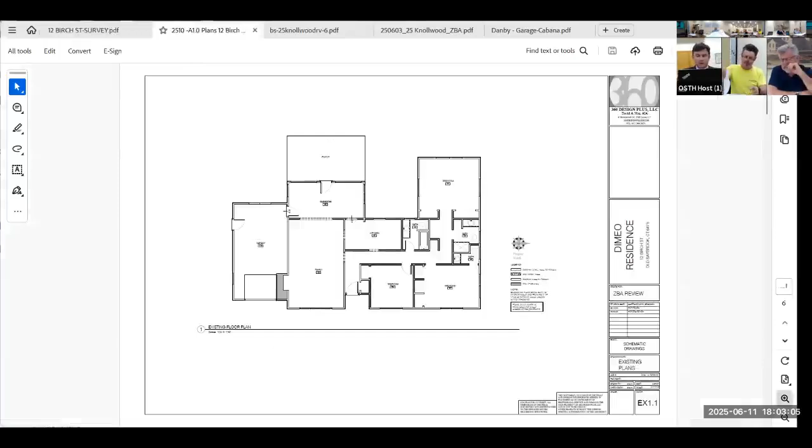As part of the floor plans, the existing floor plan shows part of the reason why we're asking the variance, in particular to elevate the roof of the garage. The garage is on the left side or the north side when you're looking at the site plan. Right now, when you walk out of the garage into the sunroom, you then have to walk up into this room that's called a family room. Okay, so the garage is low, the sunroom is a step up, and then this is a further step up. Is that right? Yes, and then the porch is off the rear of the sunroom.

So what's being proposed is to come out of the garage, redo the kitchen, living room into an open floor plan concept. When you come out of the garage, you're now coming onto the main level of the house, the old family kitchen level, into this newly updated portion. So in order to do that, when you're stepping out of the garage onto the higher level, the architect needed to raise the roof. I think it's what, 8 inches?

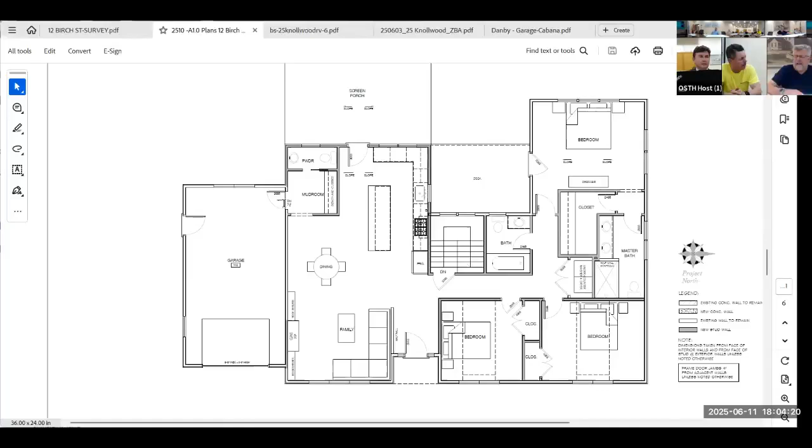So in reality, because when we look at that, it's basically a 7.5 foot step is what you're proposing. Yes, 7.5 inch. But what was confusing was that was 7.5 inches, and then on the original, in the next drawing, it's still 7.5 inches. So I was confused. So was it?

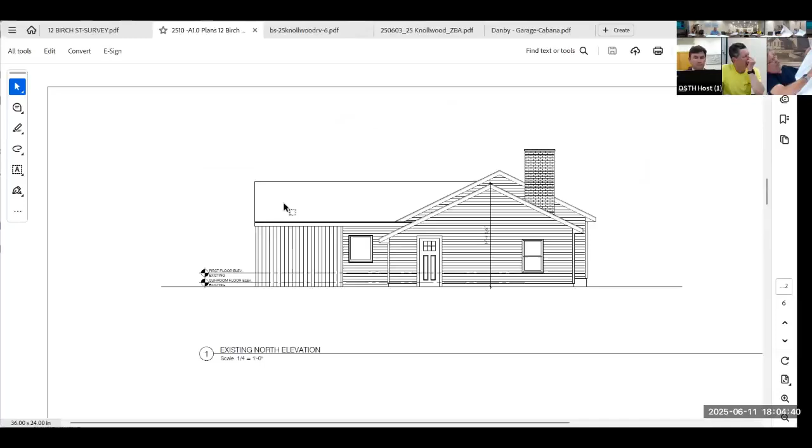Because you show, this is the original. Yep, see, on the original, you show 16 inches down, which would imply that it's a 2 foot drop almost. 16 inches, 2 steps, 2 risers. Yeah, two-step drop. That's what I was confused about. I was having trouble with that.

No, but what he just explained was that you have 7.5 coming in, and then you have another 7.5 right there. Correct, or, yeah. That's confusing to me too. Why is it 16, and then why is it inches over here, 16 over there? That's what I couldn't understand.

Well, Lorenda, when you walk from the garage into that lower level, it's straight, and then it's 16 inches up. Oh, so the sunroom and the garage are even? Yes, that was the problem. All right, the drawing's not accurate.

All right, not me, it wasn't me. No, I couldn't understand it. You understand, because it doesn't add up, because it didn't add up. I was trying, so currently, oops, sorry, you can walk directly from the garage into the sunroom. And then you have a 2 foot.

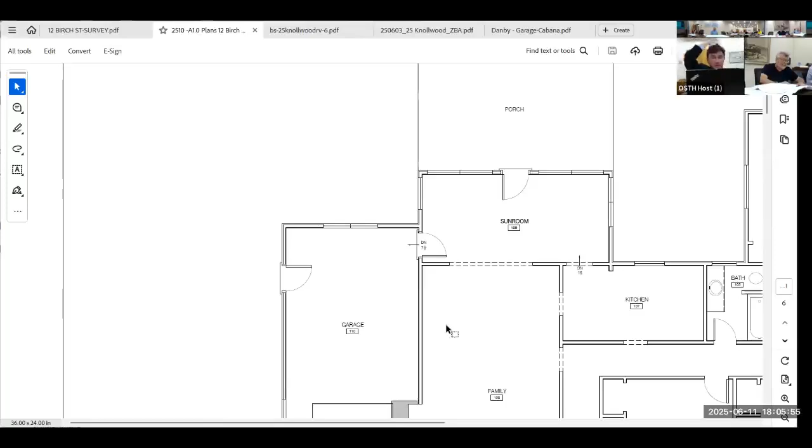So in order to make the door from the garage into the new kitchen mudroom up 2 feet, you have to raise the roof to get the headroom necessary. We want to put the stairs in the garage to get up into the house, but we don't have the height, the two risers, out of the garage into the sunroom. Okay, now it makes sense, because it didn't before.

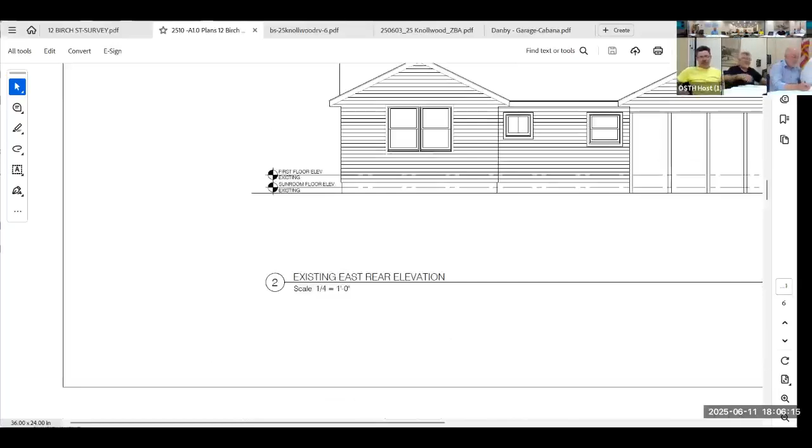Sorry, you can understand why that was confusing. I was concentrating on going from 14' 6 5/8" to 15' 3/4", but in reality we're going up 16 inches. So it's 2 steps, but not the height of the garage itself, the floor is going up.

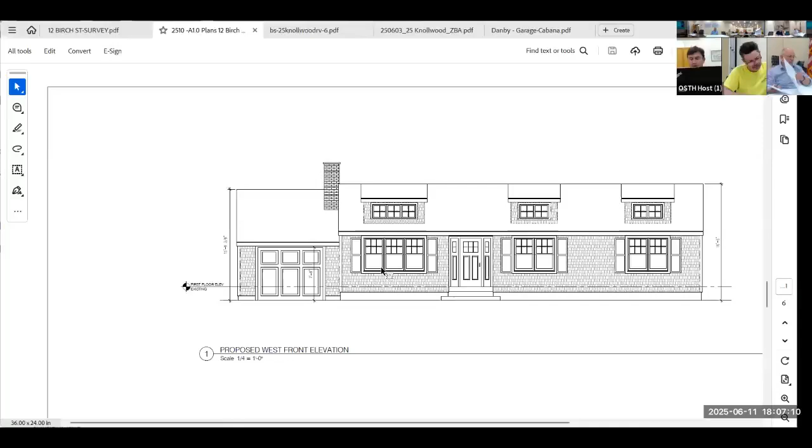And the new garage roof is no higher than the roof of the existing ranch, which is staying the same. The second thing we're asking for variances for is those 3 dormers, which are basically window dormers to allow a little bit more open air and light into the first floor.

It's a single floor, we're not adding a story, we're not changing the roof line, it's just aesthetic and light. The third thing we're doing, which doesn't require a variance, is a new deck constructed on the rear of the property, infilling between what used to be the sunroom and porch and the bedroom. So our coverage is going up slightly, but still complies at 18.9%.

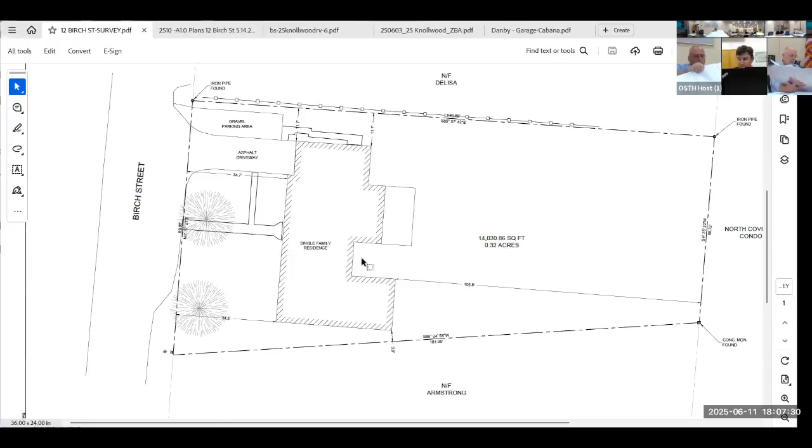On the south side, the southernmost dormer doesn't actually go all the way, it goes to 11.5 feet. On the north side, the garage being elevated goes to 11.7. So those are the 2 variances required, 11.7 and 11.5. The hardship is the implementation of the Residence A district regulations on this non-conforming lot.

House was built in 1954. As we discussed, the garage expansion is to create headroom into the main house level. The dormers just go outside the volume of the house a small amount, just a few feet for the 3rd dormer. The other 2 are legal.

No increase in height in the main part of the structure, but we believe these changes will add to the aesthetic of the house. So that's the presentation.

If I can just add one thing, there is a little bit of a step in the garage, probably about 4 inches. It's like a half step, it's the foundation. Do you want to see the picture? No, we can't do that, I can visualize it.

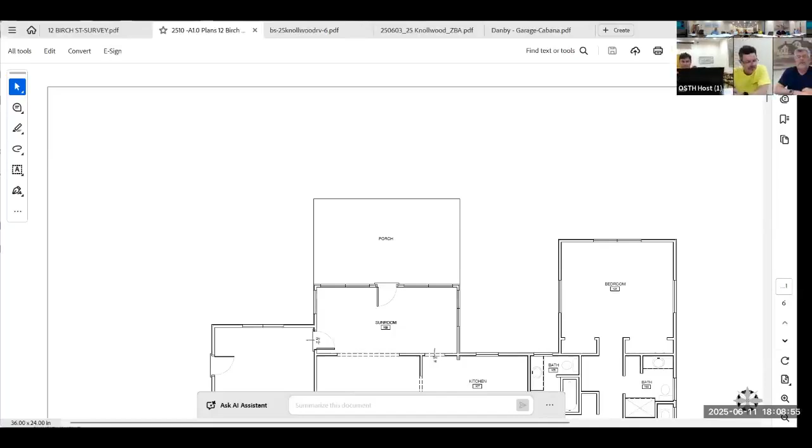Are there any questions of the applicant at this time? None for me, it's pretty simple. Marty, any questions? No.

I would make a recommendation - looking at these plans, the proposed steps down 7.5 inches from the new mudroom. I would modify the plans before you submit these to show the 2 risers, plus or minus 16 inches, so there's no confusion about what's going on. These are just preliminary, for ZBA review. I was simply making a suggestion so when they go to build it they won't be confused like we were.

All right, hearing no questions, I would like to open it to public comment. Is there anybody in the public, here or online, that would like to speak for or against this application?

A second. Anybody, would you like to add anything? Okay, hearing none.

I'd like to make a motion to close public comment. Did I get a second? Second, to close the public hearing. All those in favor?

Okay, let's go into discussion. Is there any discussion we'd like to have before I make a motion?

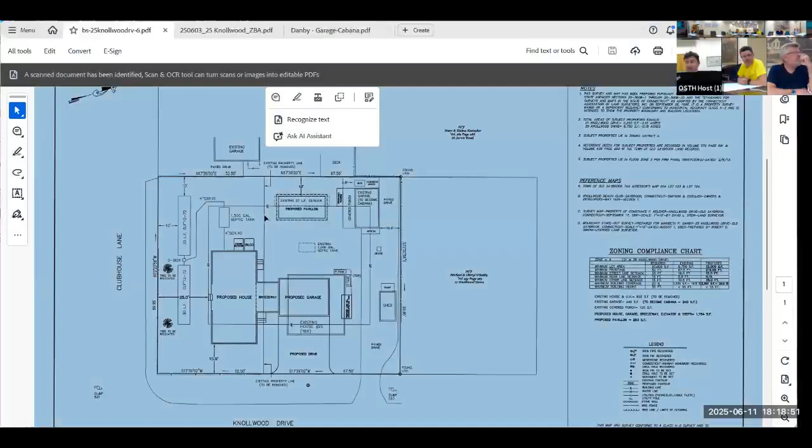So the hardship: we have the Residence A District regulations implemented on this corner lot. If this were not a corner lot, and Clubhouse Lane was the front and Knollwood Drive was the side, we wouldn't be here, correct? This would be a compliant proposal. So that's number one. Number two, we do have reductions of nonconformity.

First, there are two existing parcels right now, 6,700 and 5,200 square feet. Those are two separate lots that are both substantially non-conforming. The 6,700 square foot lot on the north with the proposed house is also too close to the side yard setback, at 11.5 feet off the side yard. That will be eliminated — the side yard setback will be eliminated, and the lot area will be substantially improved.

This has been through CRAD. You can see the design of the septic system on the left. The way it's been designed, everything's been pushed toward Knollwood Drive to make sure there's enough room for a replacement septic system if necessary.

One other positive feature about this development: these two trees shown on the site plan as trees to be relocated, both nice maple trees, will remain on the property. They can't stay in those locations, but will be moved to different spots that work with where the septic system and digging will take place. There's actually a service that comes in with a tree spade, scoops up the whole root structure, lifts it with a big crane, and digs a hole. So the Danbys are happy to keep their beautiful mature maple trees.

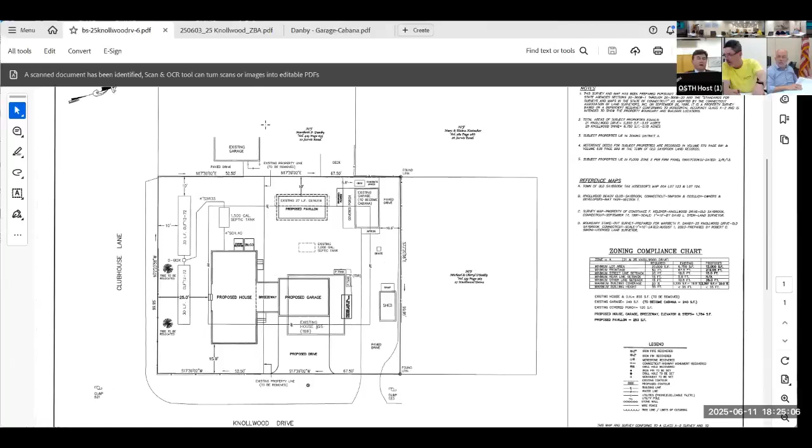Do we have any questions of the applicant? Yes, Kevin, what's the plan for the added lot in the back there? Nothing, just grass? No, lot. On this one, there's already an existing house. Oh, that's on Jarvis, okay, that's their house on Jarvis.

My question is regarding the cabana, what's actually going into the cabana? It's 215 square feet, a very, very small space. There's a hangout area, there's a sink, there's a fridge, there's a bathroom. It is not an apartment, it can't be an apartment. We've worked with Chris on this, we know it has to go to her to make sure everything is good. There are no variances we're asking for this cabana at all. So if there's a concern that it's an apartment, it's not, it can't be.

And I'm assuming it's not winterized, am I correct? It's not. Okay, just for the record. So basically the cabana just has a little spot in it, with a refrigerator, a sink, and a bathroom. No shower, correct? There could be a shower in there. Is there going to be a shower in there, or outside, just so I know? I don't know that their plans are finalized, but there could be a shower, and again, this is our discussion with Chris as to what's an apartment and what's not. That's what, that was my concern, to keep it clean.

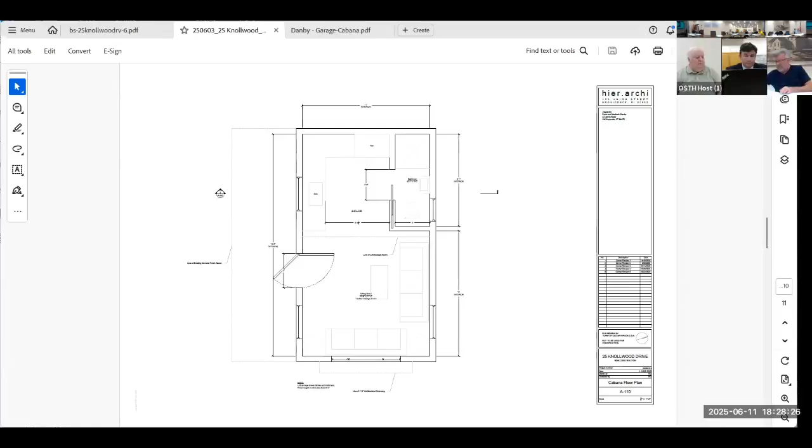Is the cabana going into the existing tank right now? No, it's not, there's no water in it. That was the reason I was asking. I want to see where the leach field is.

I don't see any drawings showing the leach field. I remember seeing it, I just don't know where it is. Do I have the CRAD in front of me? Yeah, we have two CRAD approvals because the plans got revised. I mean, on Greg's plan, on his approval.

Existing house demolished, save existing septic for cabana. Lots combined, new 3-bedroom house with new 100% compliant 4-bedroom septic system to be installed. I was just looking as to where the leach fields were. How old's the tank? Ten years. That's the only reason I'll use the existing. Otherwise, if I can't get the pitch, I can pump it to the new system.

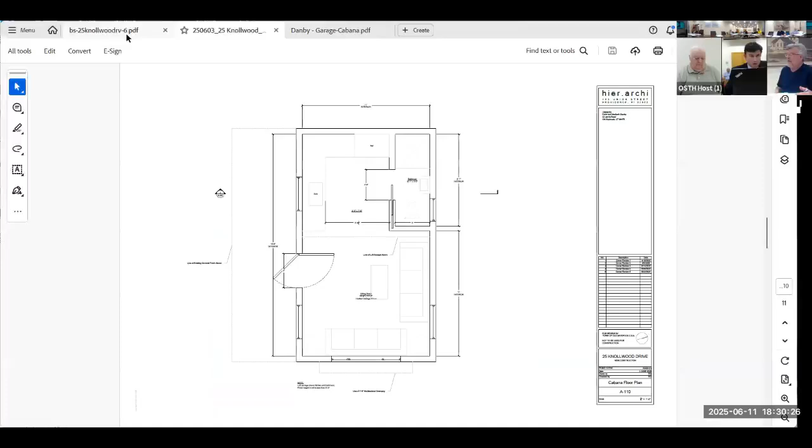I'm seeing here there's a note that says to be served by existing septic system of house to be demolished, okay? So I think yes, it goes back. I just wanted to make sure - I'm guessing too that CRAD looked at this and made the determination that, because we don't see the leach fields, it's not too close to the house. Oh, it is on there, it's actually under the proposed pavilion.

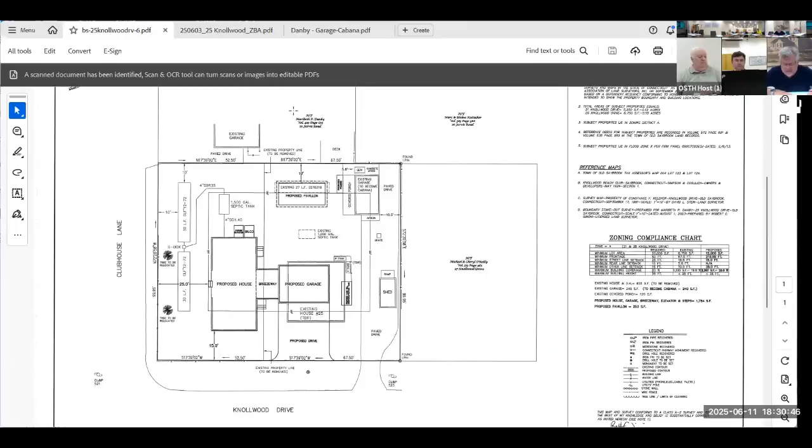Oh, existing 27 linear foot leach field. There it is, told you it went back. What is it, am I just missing it? Right above the word, right there. Oh existing, there we go, there it is. It's right there, so it's directly under - can you put it, I thought it was linear feet.

Can you actually put a pavilion on top of a leach field? Just the footing, temporary structure. Civil structure, okay, anything is just - well, that's something that would have to deal with CRAD and the building department. Yep, and this we can see, okay, I'm just trying to understand. Greg approved these plans, right, so that goes there, no problem.

Yeah, I'm gonna go with that. I just need Monty raising his hand. Nick's on, can you bring them up? Yeah.

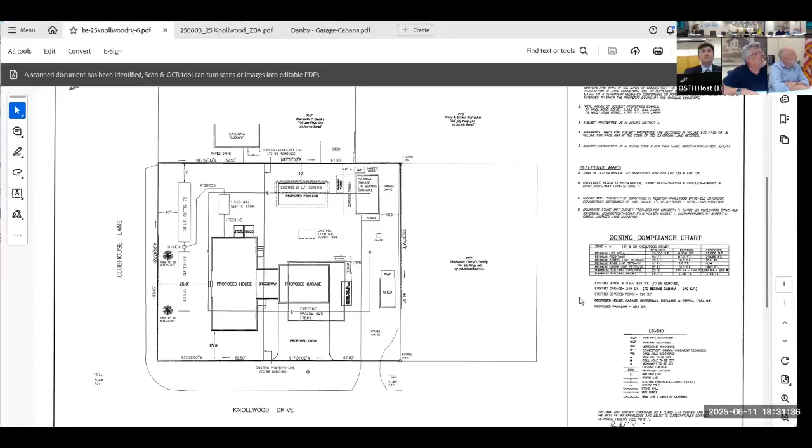Okay, so do we have any other questions of the applicant? I mean, we have the reductions of nonconformity, the cabana. So the cabana is 200 and some odd square feet - it's 215. So it's got a refrigerator, which is no problem, it's got a sink, and it's got a bathroom. So I just want to make sure.

Yeah, I mean, we still have to get this through Chris. Right, there's no variance requested for the cabana. Right, yeah, because - so if Chris tells us to jump, we're gonna have to jump, but we've talked to her about this and this is the plan we landed on.

The description calls for 240 finished accessory structure, with kitchen and bath. Is that the cabana? Yeah, that's the cabana, but that's changed slightly. Yeah, but no kitchen now, no kitchen.

Do I have any concerns on the cabana? Only because I don't have a problem with the refrigerator, with the sink, and with a bathroom, but should I have any concerns about a shower being in there?

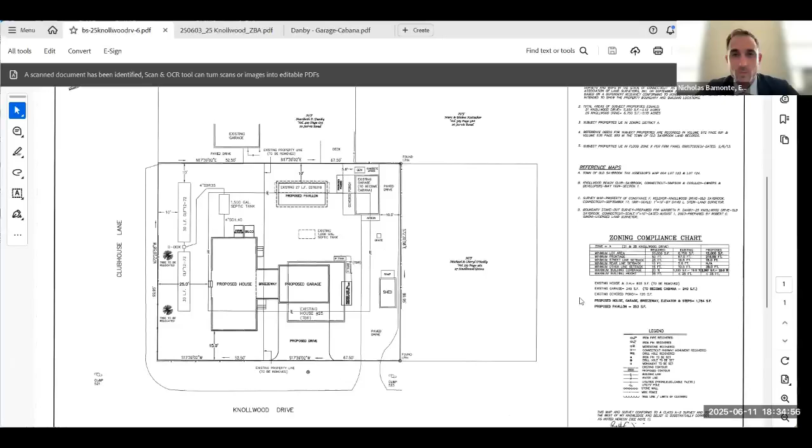I came in a little late here after the presentation, but I'm sure Attorney Casella highlighted that, or at least I would hope that's clear for this board. Is this just a cabana, or, maybe the better question is, could it easily be used as a dwelling unit?

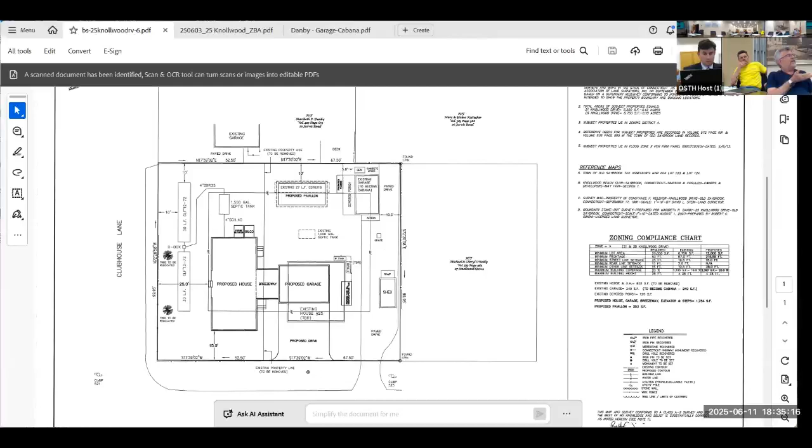I think the square footage is just too small for it to be habitable. Right, and it's not winterized. You couldn't stay in it, it's not insulated, it's not heated, it's not air conditioned, as far as I know. So that was my only concern, because I don't want us caught up in that.

I understand, yeah, and that's why we worked with Chris and amended it. I mean, I personally would feel comfortable if there was a shower outside, as opposed to one inside the cabana, because that takes it completely out of the building.

I agree with you, but putting everything into 215 square feet, there's not much left, even if you put a full bath and a shower. I'm certainly not gonna deny the applicant his doghouse in case they get in trouble with the wife.

Oh, I understand. Okay, yeah, you're right. Is it overall a man cave or a she shed? We don't know. Okay, I hear that.

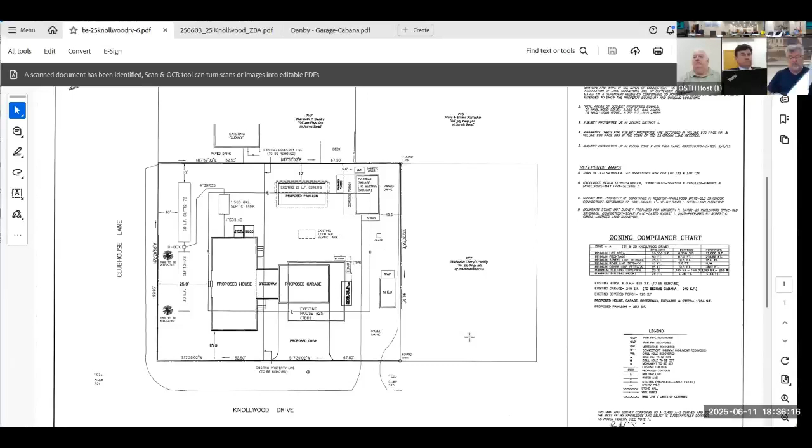Are there any other questions of the applicant? Marty? No, I'm good. I'm hearing none, okay. I would like to then open it to public comment.

Is there anybody in the public or online that would like to speak for or against this application? Hearing none, motion to close the public hearing. Second. All those in favor?

Aye. Four. Okay, discussion. I see the shed, but I'm assuming it's under 120 square feet, so it's only 2 feet off the property line. The cabana is so tiny that for it to be considered living space with what's going into it seems unrealistic, because of the fact that you have a covered porch, so the actual cabana itself is minuscule.

The pavilion is situated 10 feet off the property line, and I'm assuming it's a somewhat raised structure, and it's not gonna do any harm to the leach field, which is directly underneath it.

I can see how we can use the existing septic system to support the minor usage coming from the cabana. Should they have to abandon the existing septic system, they have plenty of capacity in the proposed septic system to handle any additional load from the cabana to the leach fields. And we have the reductions in nonconformity.